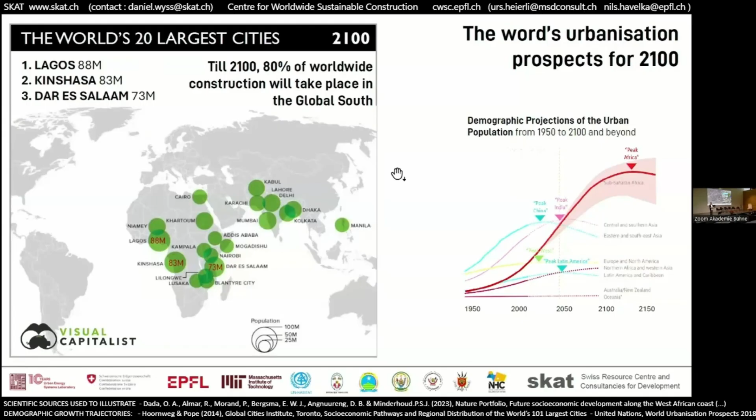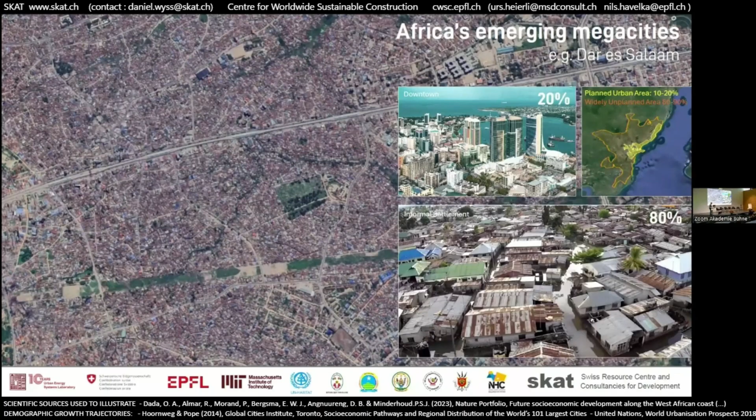So if you extrapolate the business as usual development, as Vincent has actually described it quite well in his keynote, we will see that cities like Dar es Salaam would start covering areas that are almost as big as Switzerland, or as, let's say, the inhabitable part of Switzerland, even bigger. If we look at the West African area between Abidjan and Lagos, it would even be as large as Italy. So this area will be covered if the urban development continues at low-rise level as we are having it right now, and once it reaches its 500 million inhabitants.

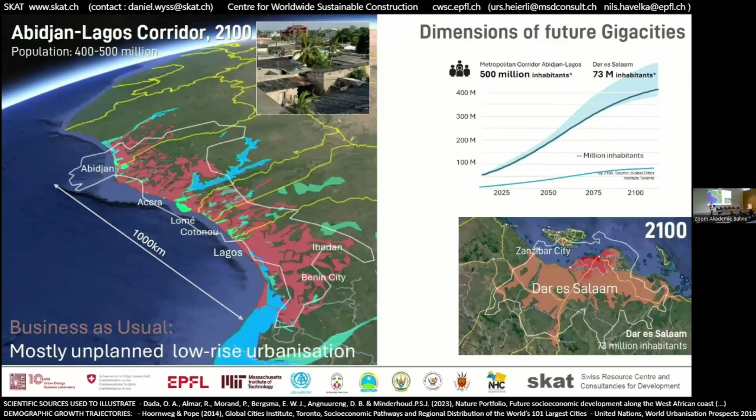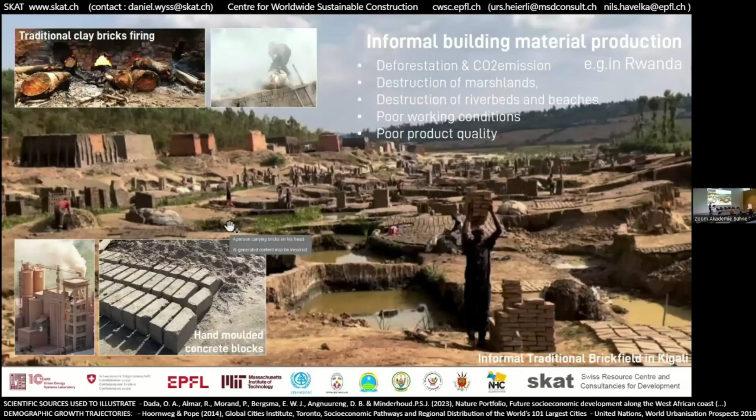Now, how will these cities be built in case of the business as usual case? This is a picture from Kigali, where I was based, where you can see a traditional brick field where brick makers are shaping and firing their bricks. They are essentially using firewood, so they are contributing a lot to deforestation. On the bottom, we can see the traditionally made cement blocks, which are, of course, referring then to the cement factories in the area. But however, there is a huge environmental impact, being it on CO2, deforestation, but also in the destruction of marshlands.

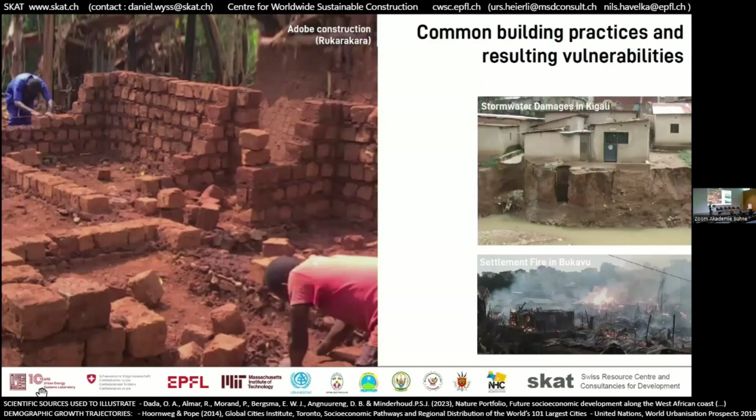The houses are built also with adobe blocks, unfired earth blocks, quite a lot. These are especially vulnerable to the increasing heavy rains. So we have lots of stormwater damages in Kigali. Nearly every heavy rain is destroying houses and actually also killing people. We have also settlement fires that are quite frequent in those areas where they use timber for construction.

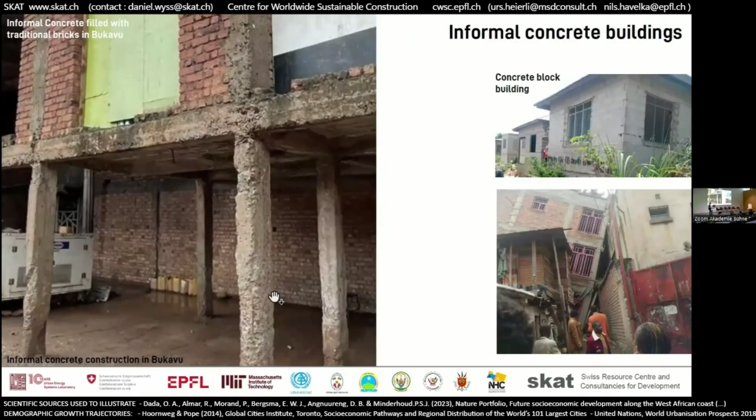There are also efforts to build multi-story buildings already. However, the concrete that is applied is of very bad quality in most of the cases. About 80% of those houses are unengineered and therefore ill-designed in terms of reinforcement and reinforcement steel coverage, and we have collapses whenever there is an earthquake or even without earthquakes. There is, of course, also the formal industry.

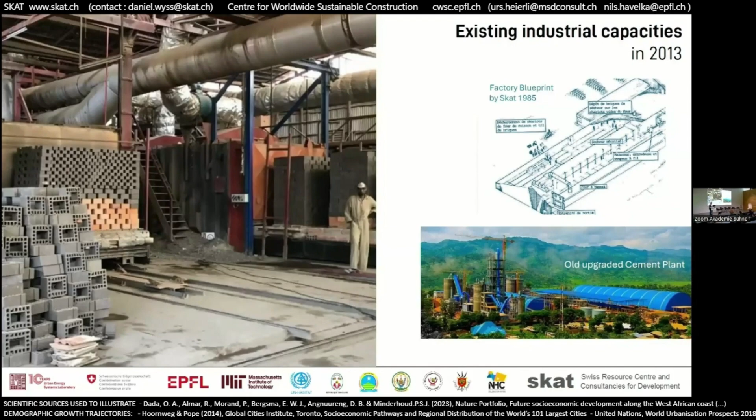We have also a representative on the panel, Andrea, who supplies technology for brick factories. We have cement factories. We have also people here that are promoting low-carbon cement production. Skat itself, back in the 80s, has been involved in the design of those in Africa as well. And of course, if a local sector can grow, then we can imagine that these large carpets of informal settlements could actually be replaced or developed in a more controlled way, designed and with multi-story buildings.

So, but how many buildings do we have to supply in order to actually allow this type of development rather than the informal urbanization carpet? In Dar es Salaam right now, it's about 500 houses per day that would have to be supplied in order to transform the city. In this area here between Abidjan and Lagos, it's already 3,000, and it will peak, as you can see, in the 60s, 70s, at about 10,000 houses per day.

So when we really want to change the cities towards cities that have green space, that have protected lagoons and marshlands and green areas, agro-industrial hinterlands, we have to get there somehow, and that's the question now, how?

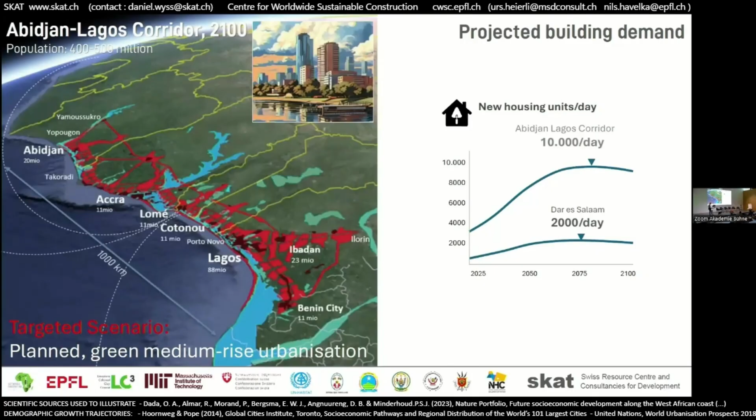Come to the next. Sorry, let me.

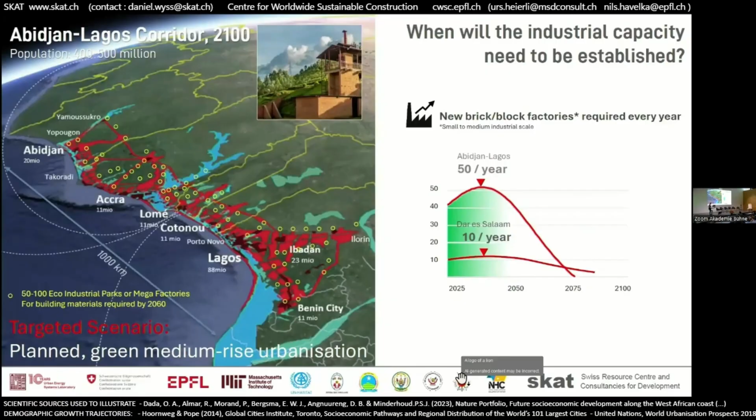Here, yeah. Okay, if we look at the number of factories or even industrial zones we need, you can see it here on this map. So we need between 50 and 100 industrial zones in this area to be established in the next 30 years, in order to produce the given number of houses. So it's actually our generation, it's us now that we have to prepare the capacity, the industrial supply capacity, the construction capacity to keep up with the growth of this area.

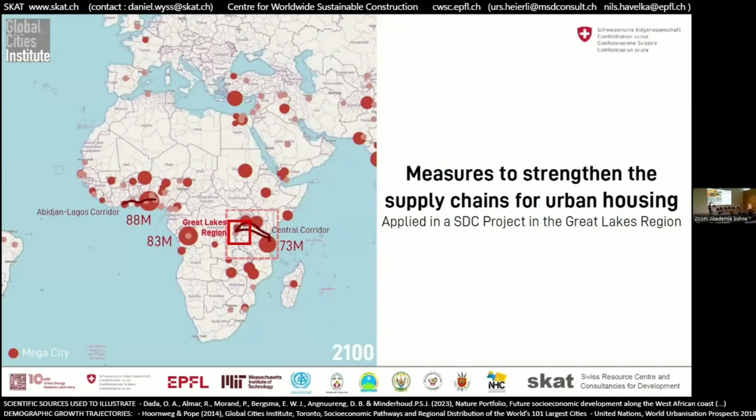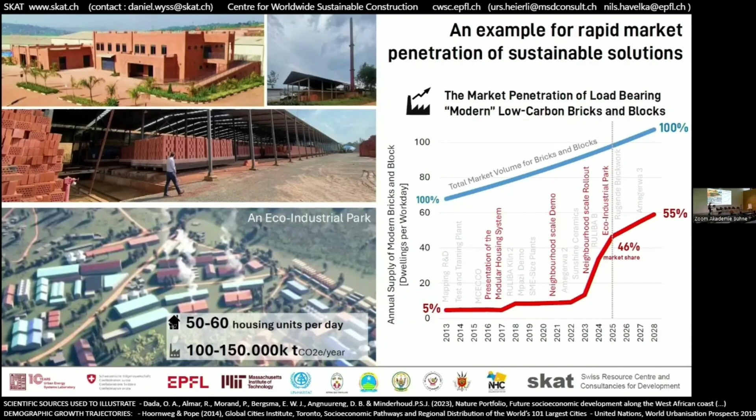Here, yeah. Okay, what did we do to get there? So the first question was, how can we actually reshape these already existing large areas of informal settlements? So we developed, together with UN Habitat, a guide for participatory transformation of those areas. So we need to mobilize the existing inhabitants, we need to link them up with possible investors, with the authorities, obviously, who are guiding the whole process. I have the guides here, so you're welcome to look at it later on.

We also, yeah, here we are. We developed, there is a pointer. Yeah. No, maybe.

Together with the authorities, we developed methods to transform the small neighborhoods, larger neighborhoods, from these informal, unplanned areas into city blocks that have all the qualities the people actually want. There are different ways to do it incrementally or to do it as a project that actually redevelops it, also with the involvement of investors or of government funds.

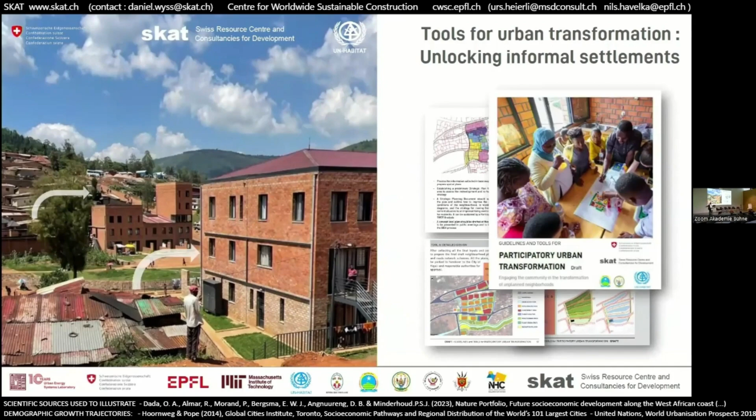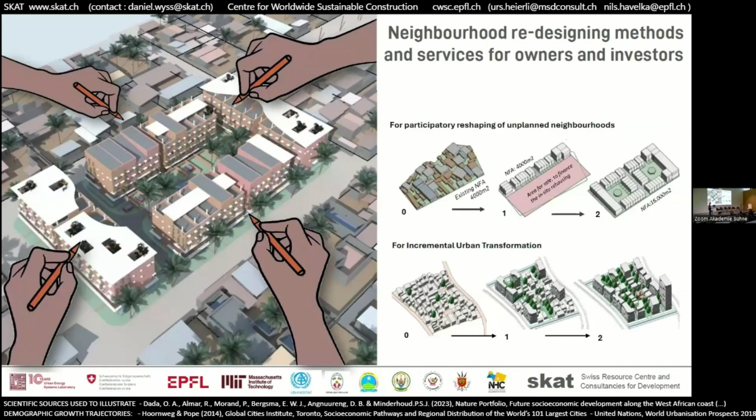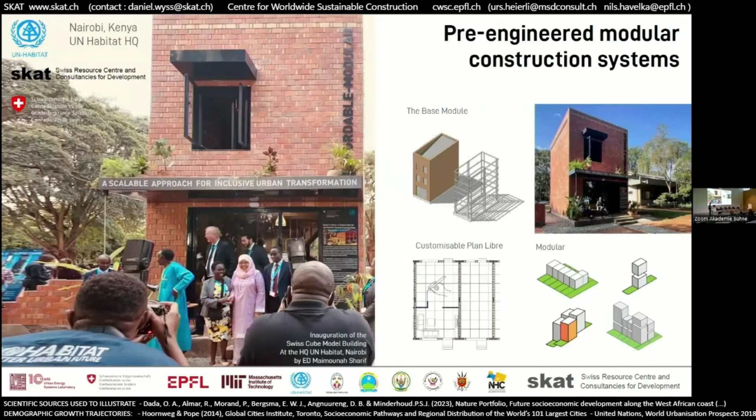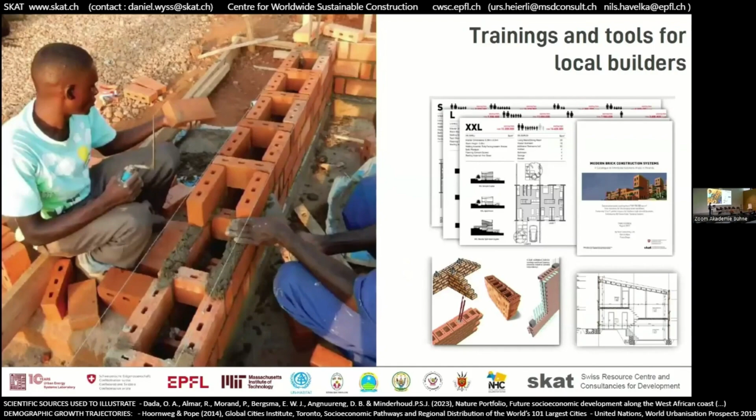This is at UN Habitat in Nairobi. You might recognize in the blue dress, there is Maimounah Sharif, who was actually inaugurating that building 2 years back. And we provided all the different accompanying handbooks and trainings for masons, for engineers, for homeowners actually to design their own house type out of that.

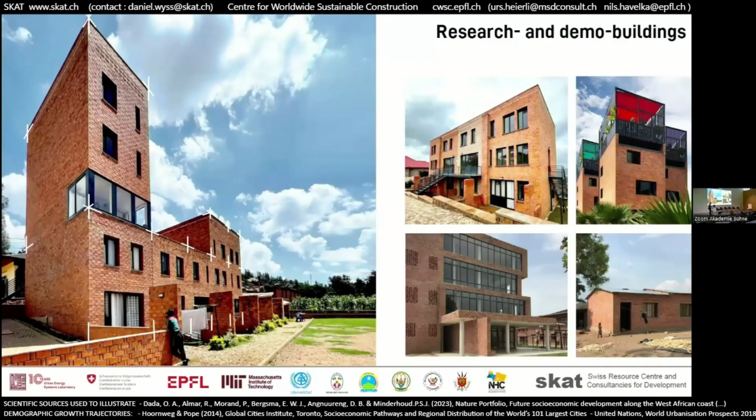And we demonstrated it as well, but this was very important to have buildings there which the people from the neighborhood could actually visit. We did it in a way that is very undecorated. It looks a bit naked, but every owner can, of course, decorate, add balconies or whatever, do whatever he likes, paint it. But they copied it in multiple ways very rapidly, as the next picture shows.

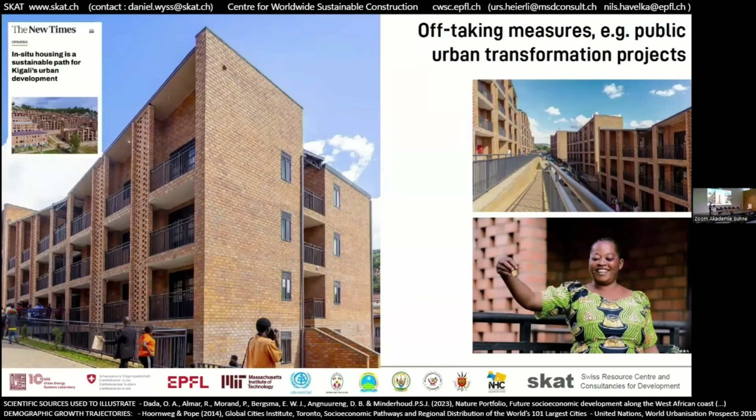These are more recent pictures. They have been finishing now the first larger neighborhood and are starting now with other ones. So this is also in situ rehousing, reconstruction with this construction system, also with various designs. And it's now being rolled out in Rwanda. Let me see if I can see the next picture.

Now for the industry. This demand has triggered a lot of interest among investors as well. So we had small investors who wanted to establish brickyards. We had also the larger producers that extended their own production, added equipment, or even built new factories. And we provided a couple of services to the industry, like we mapped all the clay reserves in the country.

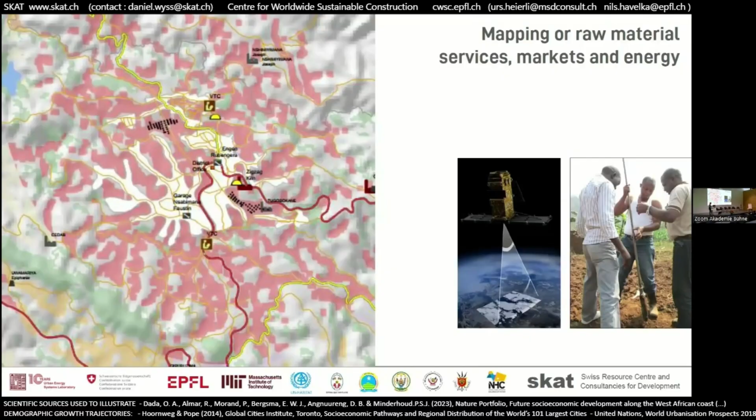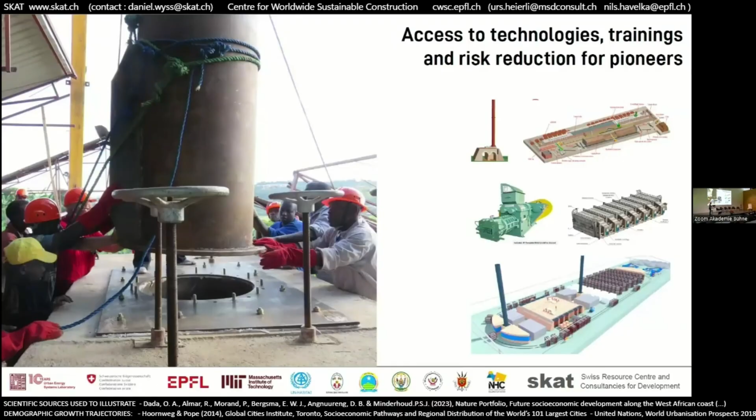We availed a large catalog of different technologies for the small producers to the large producers, and also helped them to showcase them and to help the pioneers to succeed with it. So we focused a bit more on the local investors, while of course international companies like Händle supplied the technologies for the large producers.

And here, I think that's the last slide. This is now an illustration of the eco-industrial park, which has been designed and launched, I mean, in terms of announced, that should accommodate all types of small scale, medium scale, and also larger producers of timber, of low carbon cement, of precast concrete, etc., in order to increase the supply capacity of the local industry.